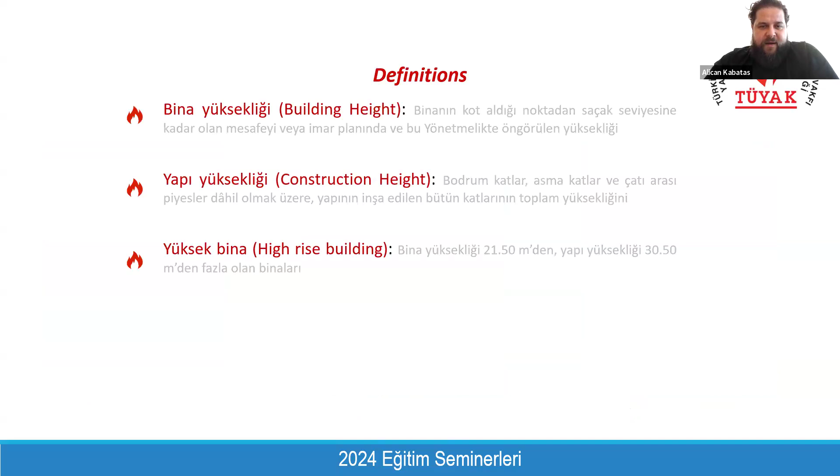We have three main codes and standards: Turkish Fire Code, NFPA 101, and NFPA 5000 that we follow during the architectural design. We had the definitions: building height, construction height, and high-rise building. Building height is measured from the ground level to the roof, and the construction height includes basement floors into the measurement. I would like to just summarize to remember what we are looking for during architectural design of the buildings.

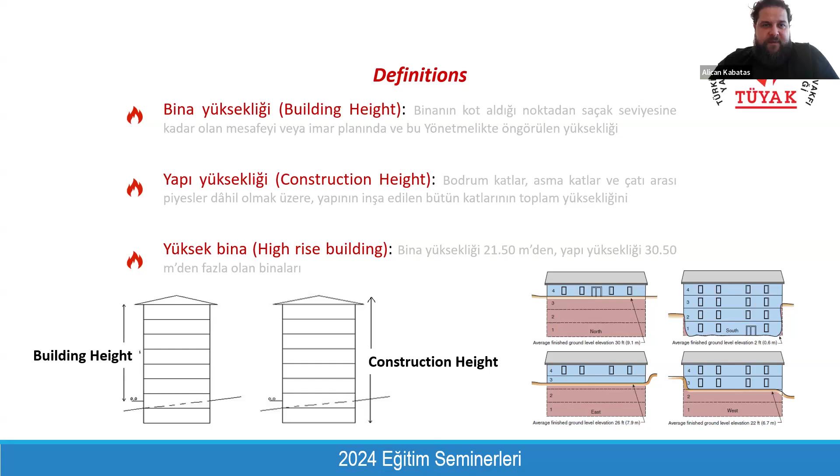I will not focus on these issues. This is a sketch of the measurement of the building height.

When the building is high-rise, as per Turkish Fire Code, high-rise building means your building height is exceeding 21.5 meters, or the construction height is exceeding 30.5 meters.

When the building is becoming a high-rise building, the automatic sprinkler system, landing valve system, and any other system that we will talk about become mandatory and should be provided within the building. And both the main technical rooms and the existence of this system within the floor, especially on the ceiling, will affect your architectural coordination and design.

It is better for architects to understand what we will have while we are designing the building. Otherwise, you will become aware only when the MEP designer submits their drawings, but it will be too late to coordinate them. It will cause you a problem to find a place to locate these additional systems.

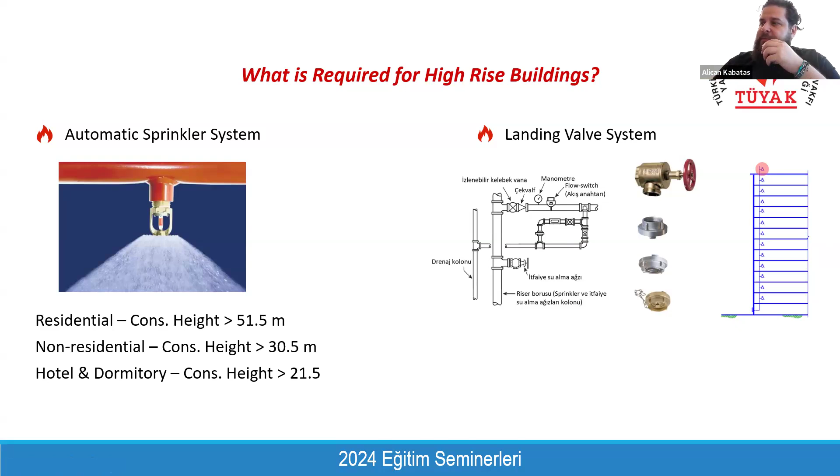And we have the landing valve system for high-rise buildings. It is located within the staircase. It means while you are designing the staircase, you should find a place to locate the landing valves. Otherwise, it will cause you a problem during the coordination of the systems.

And also for the high-rise building, we have a requirement for a pressurization system. If the construction height exceeds... or the height of the stairwell from the lower level to the ceiling of the stairwell exceeds 30.5 meters, or the stair serving more than 4 basement floors, should have a pressurization system.

Likewise, if you have a fire service access elevator, meaning the construction height exceeds 51.5 meters, this fire service access elevator well should also be pressurized. We will talk about the effects and consequences of having a pressurization system. We need to find a place to locate the fans, and also a place to locate the shafts, which should be neighboring the stairwell and the elevator well.

Also, we will have some corridor exhaust systems for high-rise buildings with construction height of more than 51.5 meters, and for hotels and dormitories regardless of construction or building height. If the corridor length exceeds 45 meters, either you need to divide the corridors into parts not more than 45 meters, or you should provide a corridor smoke exhaust system.

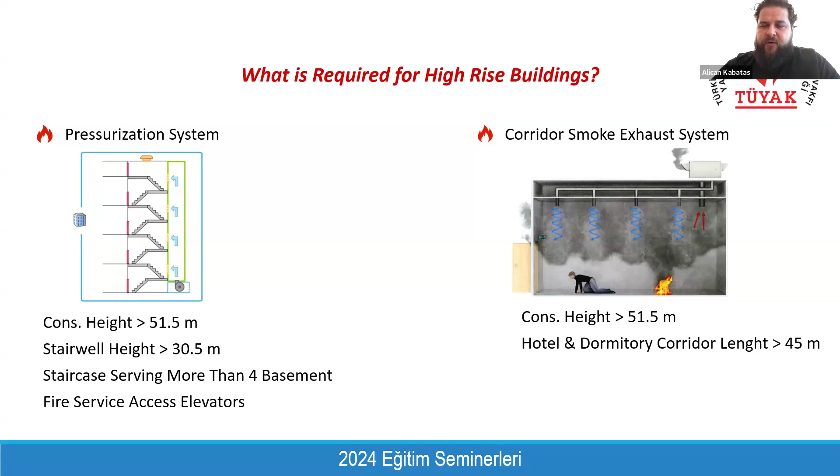When you have a corridor smoke exhaust system, you need to provide additional shafts for the mechanical designer, and it will affect the core design of your building. That's why this is also important.

In Turkey, while you are designing your building, the facade design is also very related to fire and life safety. The main thing is the material selection during facade design, which we already talked about in the architectural design lesson. Today we will see the details of the facade.

As per Turkish fire codes, you either have 1 meter by 1 meter of parapet having a 2-hour fire rating between the floors, or you need to provide a closely located sprinkler facade protection to prevent fire coming out from the window and reaching the upper levels. That is the main purpose.

And that's why if you don't want to have facade protection very closely located, 1.5 meters from the facade, with spacing between sprinklers not exceeding 2 meters, you need to design your facade to have a solid 1 meter height parapet.

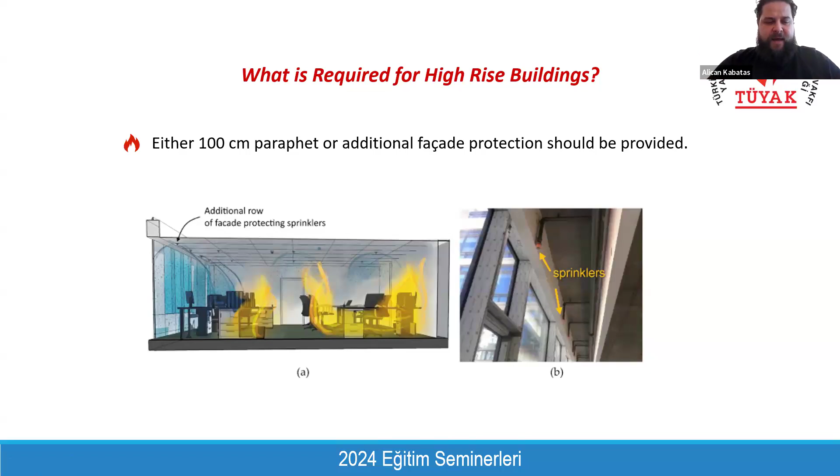And as you can remember, we have some common path of travel and travel distance limitations. These limitations change with the existence of an automatic fire suppression system, a sprinkler system. That's why even if the sprinkler system is not mandatory within your building, architects can prefer to have a sprinkler system to use smoother common path of travel and travel distance limitations.

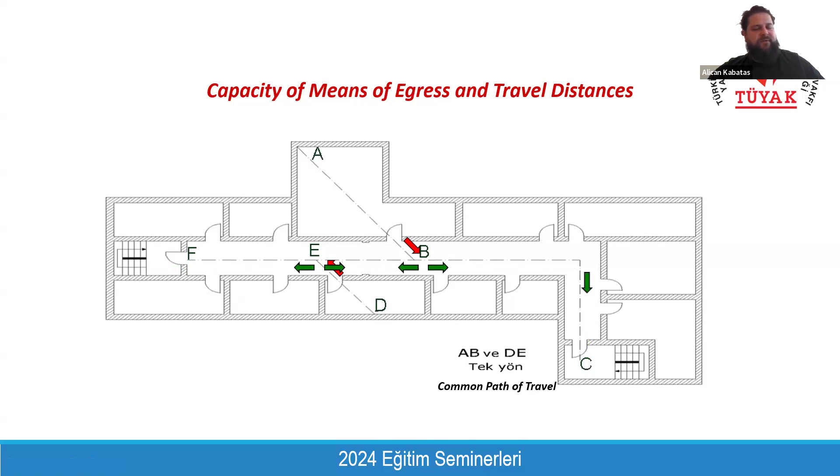It is up to the architect's decision. As architects, you will define the provision of the sprinkler system according to the travel distance measurements of your building.

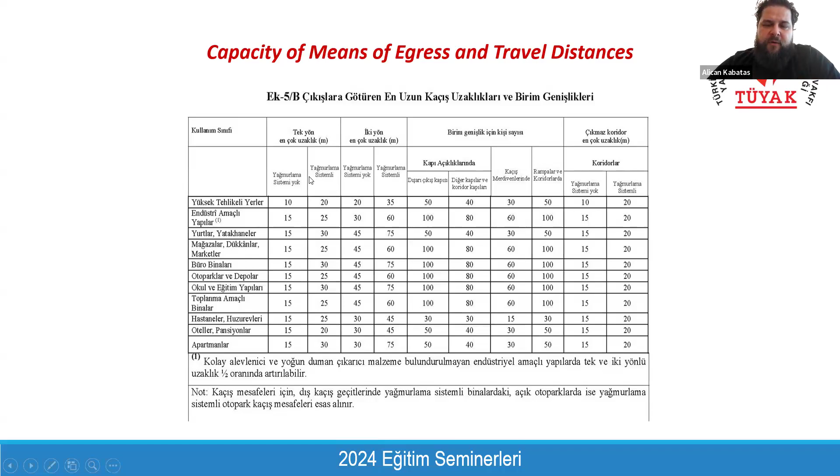As you can see, if you have a sprinkler system, the limitations become more smooth and flexible, and it changes your design constraints. Even if you don't need a sprinkler system per Turkish Fire Code, depending on your design requirements and the architectural design of your building, you can still choose to ask the mechanical designer to provide a sprinkler system.

I'm passing these ones. Sorry. And...

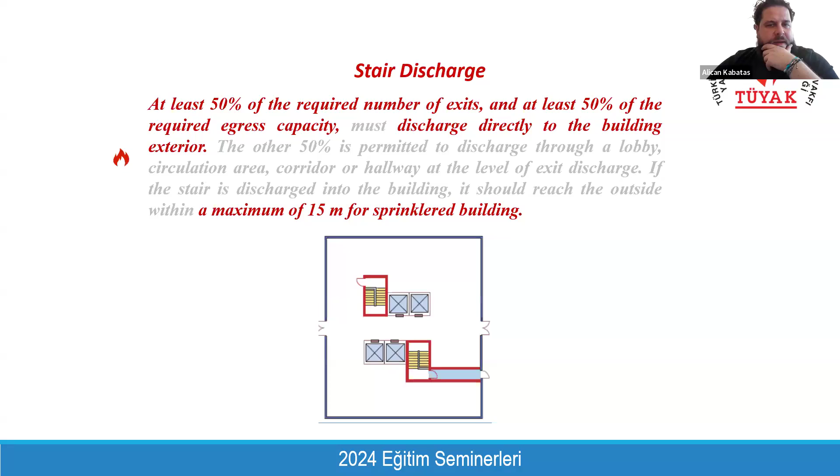While designing your building, if you have a sprinkler system within it, the heart of the sprinkler system is the fire pump room. Without a fire pump room, the system won't work.

That's why we need to locate these fire pump rooms in places that are accessible in case of fire or any other emergency. That's why we try to provide direct access from staircases, and you need about 150 to 300 cubic meters of water tanks to feed the system.

It changes from 60-minute to 90-minute capacity according to the occupancy classification of the building design. But you will have water tanks, and they will be quite huge within your building.

Since statically solving these heavy equipment loads is very challenging, designers always prefer to locate them on the lowest basement floor, so that all the load is supported directly by the ground, and you don't need to find a challenging solution from the statics point of view.

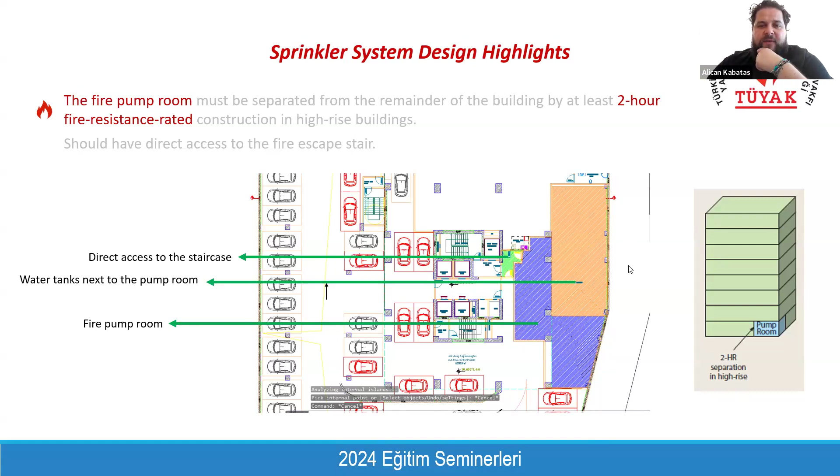That's why even if the whole level is affected by smoke and heat in case of fire, you should have easy and safe access to the fire pump room. Direct access to the staircase is very important and required by international codes and standards. As architects, when designing the building, you need to find the proper location for the fire pump room.

And the sprinkler design has some pressure limitations as well. We have minimum pressure requirements at the top level, and maximum pressure limitations at the bottom floor. That's why every sprinkler system is vertically zoned, each zone not exceeding 45 meters.

For every 45-meter vertical part of your building, there will be a separate vertical pressure sprinkler zone. Up to 3 zones, meaning up to 135 meters, you can solve the sprinkler design from the main fire pump located on the basement level.

But if your building height exceeds 135 meters, then you need to provide an intermediate level fire pump room to feed the upper floors, and it will cause a challenge for your architectural design.

You need to find a place at this higher level to locate the fire pumps and also water tanks.

But these water tank capacities are relatively small compared to the main water tanks—only 50 cubic meters. That's why they won't cause a lot of problems regarding static design.

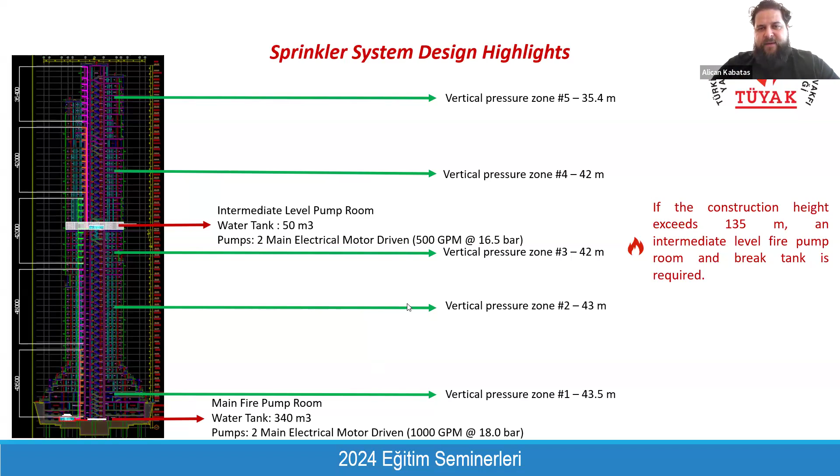It is located around 130 meters. When you look at the building, you can understand where the intermediate level technical room is—it's easy to see from outside the building. As architects, you need to know that you will have this kind of technical room if you are designing a very high-rise building.

Sprinkler system design also requires some design points that cross with the architectural design. For example, sprinkler risers, landing valves, and control valve sets. In every floor we have a valve and other equipment, and by passing through this equipment, our water reaches the floor and protects the whole floor.

But this equipment, and also the landing valve, should be located within the fire escape stair. The main reason is that the fire escape stair is considered a safe place, and in case of any fire, you can reach the fire escape stair without risk. That's why all fire safety related equipment is required to be located within the stair landing.

Also, when the fire brigade comes into the building, they will use these landing valves to take water and fight the fire. In order to prepare safely, they prepare themselves within the landing of the stair, where the landing valve is found, so they prepare their hoses and attach them to the landing valve before going into the floor to fight the fire.

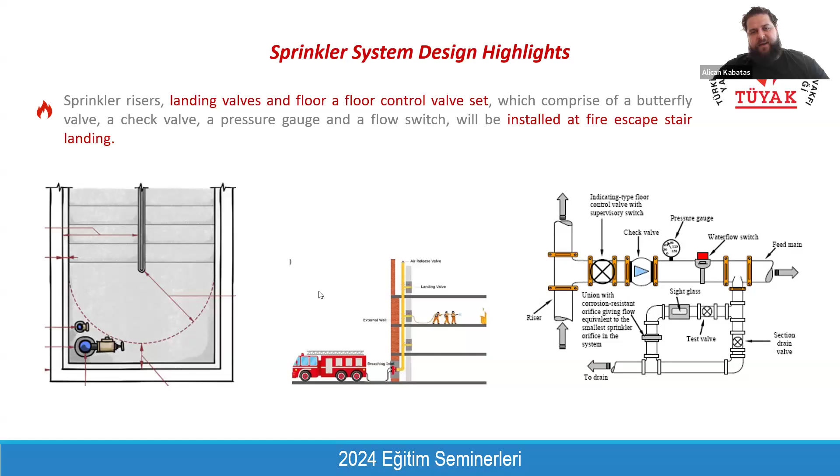Also, if your building has a fire service access elevator, we recommend providing the riser and landing valve in the stair neighboring the service access elevator. As you may remember from previous lessons, the fire brigade comes up to one floor below the fire incident, prepares there, uses the landing valve, and then goes into the incident floor. That's why it's very important that they have a landing valve within the stair.

Why do we locate the landing valve within the stair instead of the fire protection lobby? Because there can be a water leakage from these landing valves, and if water leaks within the lobby, it can reach the elevator well and cause the elevator to fail.

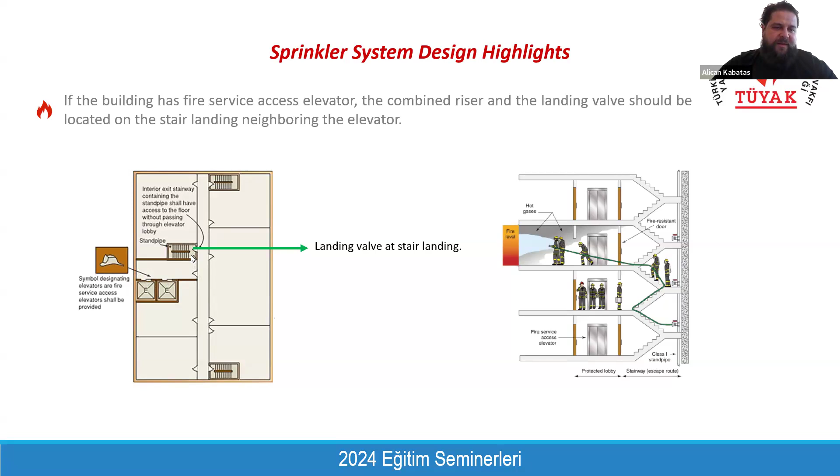That's why, instead of placing these landing valves into the fire protection lobby, we prefer to place them within the fire escape stair. So in case of any leakage, the water will not come into the lobby; instead, it goes down the stairwell.

Also, while checking the sprinkler design, it is very popular nowadays to use baffle ceilings or open grid ceilings, but nobody knows their effect on the sprinkler system. When these laminated baffle or grid ceilings are designed architecturally, the architect doesn't want to see any kind of installation beneath the ceiling.

But as per NFPA, if you don't want to locate sprinklers beneath these ceilings, there are some provisions: the opening rate of the ceiling should not be less than 70%, the spacing between the laminations should not be less than the depth of the lamination, and the h, the vertical distance between the sprinkler and the baffle ceiling, should not be less than 45 or 60 centimeters, so that you can omit the sprinkler beneath the ceiling.

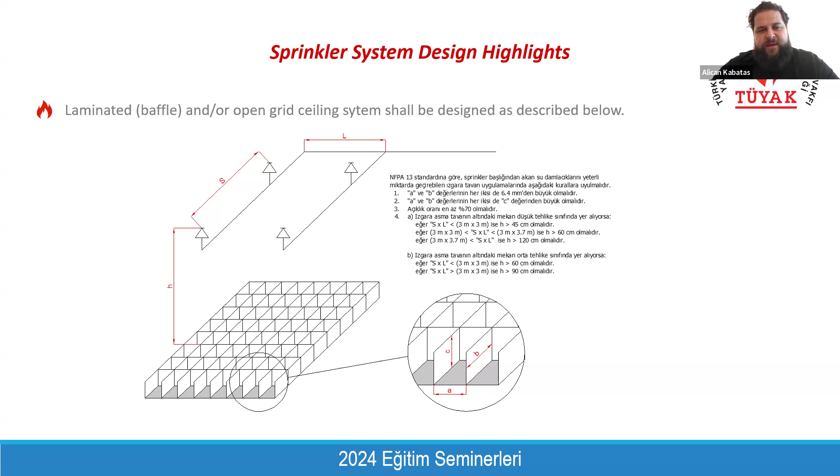If you are not aware of these rules, and you design your ceiling without fulfilling these requirements, at the end of the day the fire consultant of your project will require an additional level of sprinkler system beneath the ceiling, and it will change your design and the look of your ceiling. That's why it is also important.

And these are our sprinkler systems. The colors may not match your interior design, but we are not allowed to paint these sprinkler systems on site. This should be remembered during site checks by architects who work as a site consultant.

It should not be painted on the site. Instead, during the procurement phase, you can give the manufacturer the RAL code of your ceiling, and they can manufacture sprinkler heads with the same color as your ceiling. If you don't want to see these details, the deflector and the activation bulb, you can use recessed or concealed type sprinkler systems.

Concealed type sprinkler systems have some plates. These plates are also not allowed to be painted, but you can procure them with a RAL code matching your ceiling design.

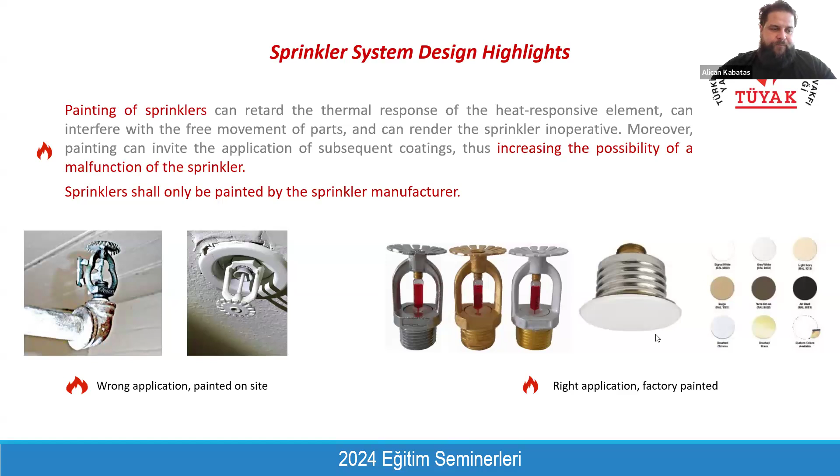But all of this coordination, the code selection, the color selection, and the procurement should be coordinated by the architect, and all required information, such as the color code of the ceiling and the preferred type of sprinkler heads, either semi-recessed or concealed, should be defined and determined by the architect. That's why you need to inform the mechanical designer accordingly.

As you know, we have fire hoses within the floors, and these hoses are not liked by architects. They don't want to see these fire hose cabinets, and they always require covering them with decorative floor finishings. We are allowed to cover these hoses, but we need to emphasize that there is a fire hose cabinet at the back of this wall covering.

As per NFPA, we have some pictograms and definitions for proper signage. We need to follow it and provide signage with the required dimensions and contrast colors, so that in case of fire, the occupants of the floor can understand where the fire extinguisher and fire hose cabinet are, so they can address the fire at the beginning and prevent it from developing.

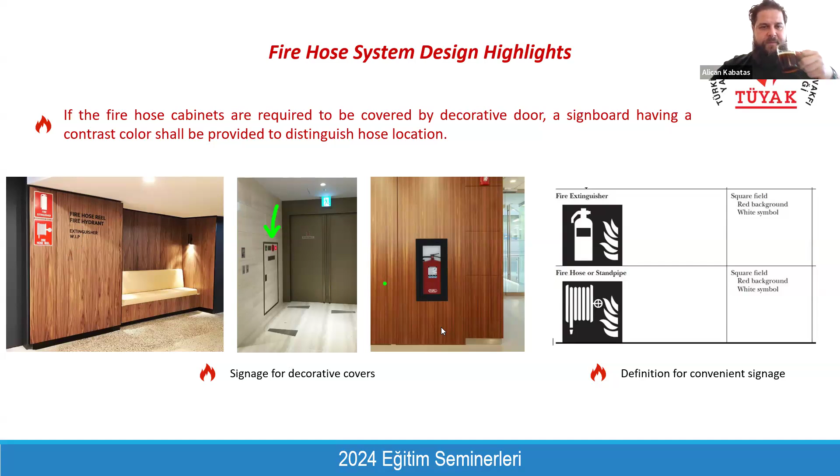These embedded flush type fire hose cabinets are not allowed to be located within a fire rated wall, because embedding this kind of material into the wall reduces its main thickness, and the thickness of the wall is what creates the fire rating. That's why if you would like to locate fire hose cabinets onto a fire rated wall using embedded or flush type cabinets, you need to design your wall construction accordingly.

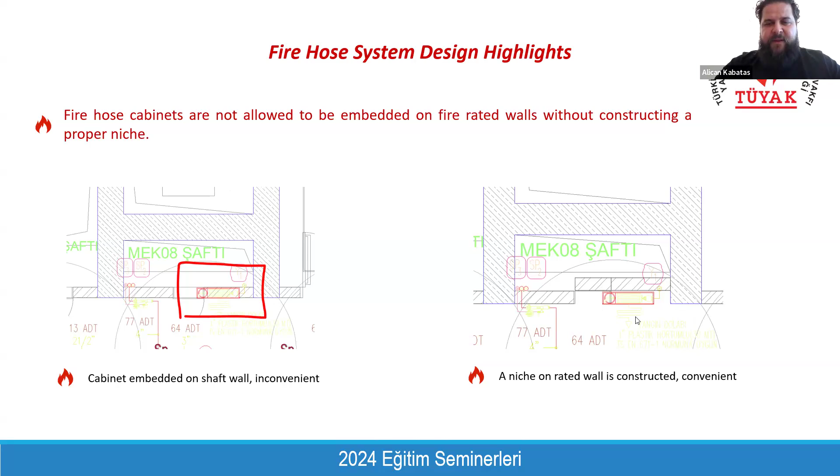You need to design your wall with a convenient niche on it. Owing to this niche, without damaging the wall, you can locate your fire hose cabinet, and it can look like an embedded flush type cabinet from an architectural point of view.

For high-rise buildings, hotels, and dormitories, we will have a corridor smoke exhaust system design. This system should have a smoke shaft, and in order to achieve smoke extraction, we also need a fresh air shaft. We need to provide fresh air, and then extract it from the floor, meaning we will have at least two additional shafts.

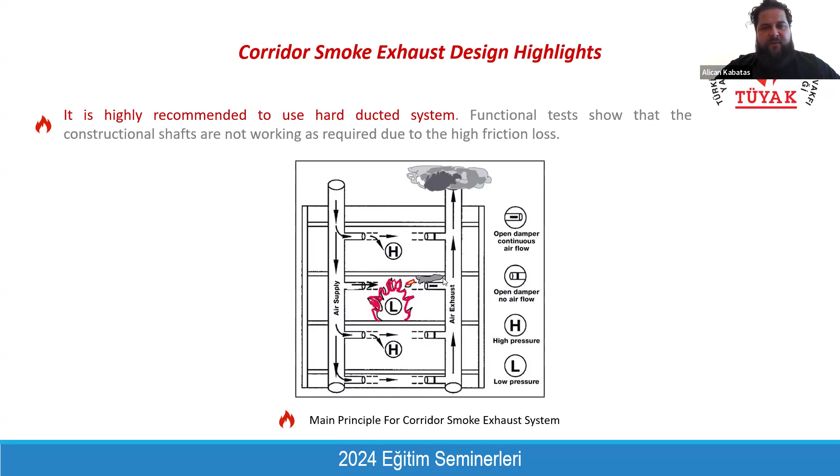The dimensions of these vertical shafts depend on the capacities of the smoke extraction system, and their locations are really important. The locations are generally determined by architects. Even if the mechanical designer insists on certain locations, if it's not accepted by the architectural team, it will not be applied on site. That's why, as architects, you are responsible for finding a proper location for the shafts.

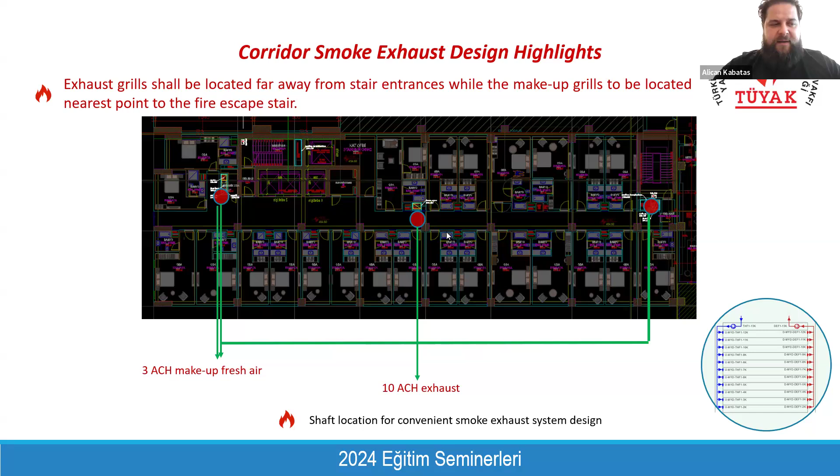The exhaust shaft is determined to be as far as possible from the stair entrances. The makeup, or fresh air, shafts are located nearest to the staircase, so that when you provide fresh air next to the fire escape stair and extract smoke from the farther location, you move the smoke from the entrance of the fire escape stair to the center of the corridor, keeping the entrances of the fire escape stair smoke free. This is the main design principle architects should know.

Also, if you have a pressurization system, it prevents smoke from entering the fire escape stair by giving fresh air into the stairwells. That's why the location of the pressurization fan is very important.

You either need to locate it at the top of the stairwell, meaning outside of the building, or you can locate the fans within the building. But when you locate the fans within the building, the room where the fans are located will be considered part of the fire escape stair, meaning it should be 2 hour fire rated and separated from other areas.

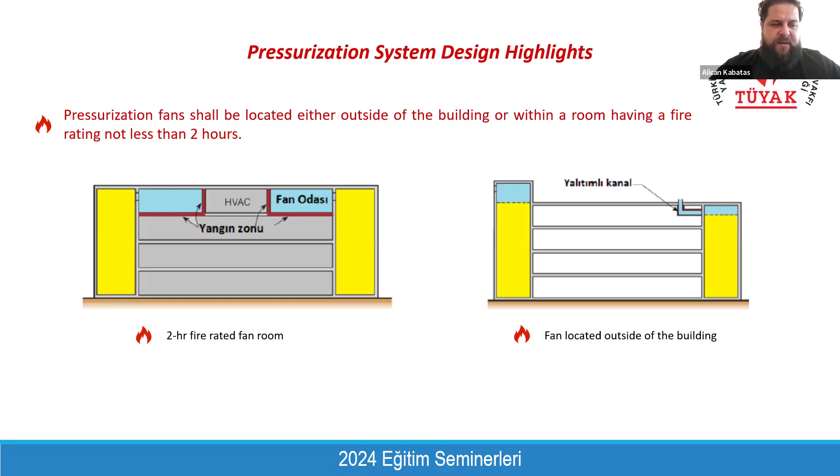If the fan is located outside of the building, you need a duct between the fan and the stairwell. This duct should be 2 hour fire rated and insulated, so that the shaft can be considered extended up to the pressurization fan, and it will be safe in case of fire. Our main purpose is to keep the integrity of the fire compartmentation of the fire escape stair, ensuring that its fire zoning will not be interrupted by any other equipment or occupancy within the building.

If the stairwell height exceeds 25 meters, we are not allowed to use single injection, meaning giving air from the top of the stairwell. Then we will need a pressurization shaft for multi-injection.

It is achieving a good pressure equivalence within the stairwell. Otherwise, if you just give air from the top, the higher floors will have relatively high pressures while the lower floors will have less pressure, causing a stack effect, and smoke can interfere and go through the stairwell, causing a life safety problem. That's why if the stairwell height exceeds 51.5 meters...

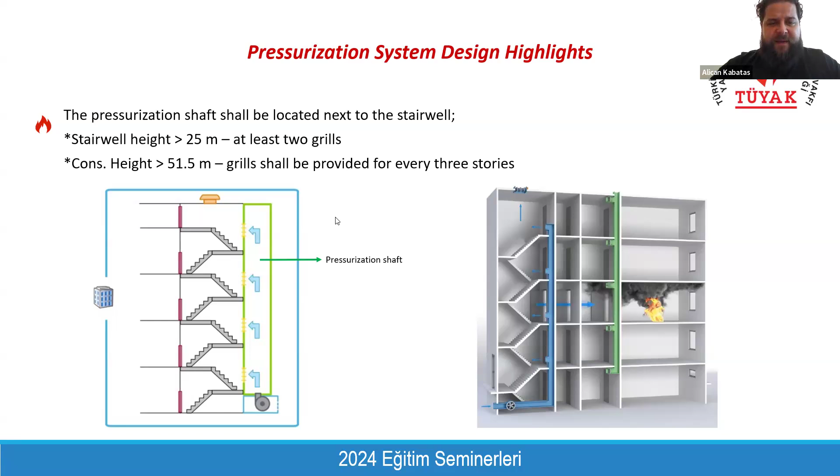we need to have a pressurization shaft, and this shaft should neighbor the fire escape stair, because the pressurization shaft is a part of the fire escape stair. It should be considered as an extension of it, so it should be just next to the fire escape stair, and the wall between the fire stair and the pressurization shaft should not be required to have fire rating.

But all of the other three walls should be fire rated. That's why if you are designing a high-rise building that needs a pressurization shaft, it should be designed at the beginning of the project. Otherwise, finding a place for that 1 square meter shaft will be a huge problem during your core design. You need to take space from other shafts or technical rooms, or enlarge the core,

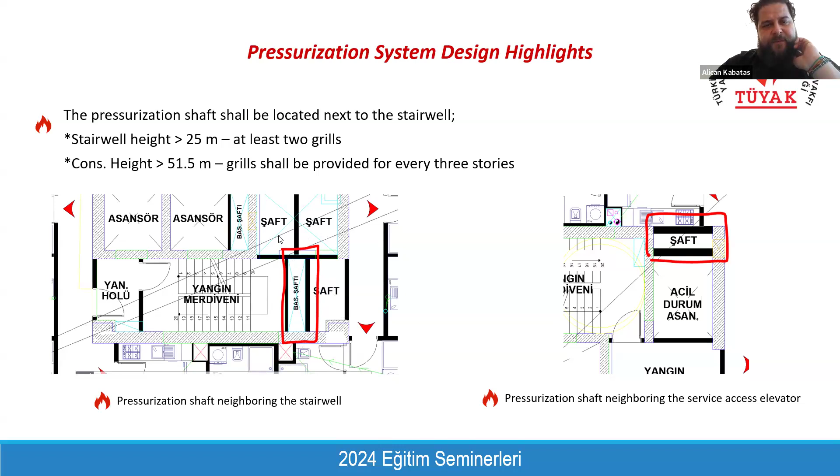which will not make the investor happy. Also, as I stated, the required area for the pressurization shaft is about 1 to 1.1 square meters. The aspect ratio is also important - the ratio between the length and width of the stair shaft. It should not exceed 1/4, because otherwise, even if you provide 1 square meter, the shaft will not work as required. It will cause a lot of pressure drop and the system won't work.

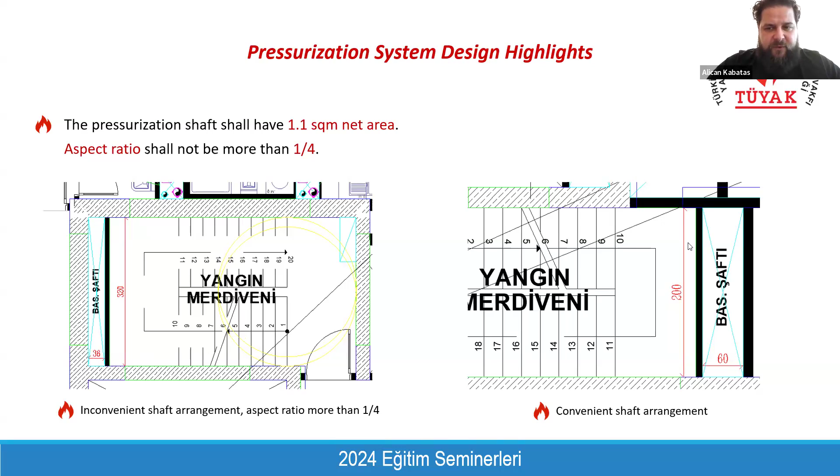That's why while designing a shaft, it should not be very narrow, and it should not be very wide. The aspect ratio should be kept between 1/3 and 1/4 so that it can work as required.

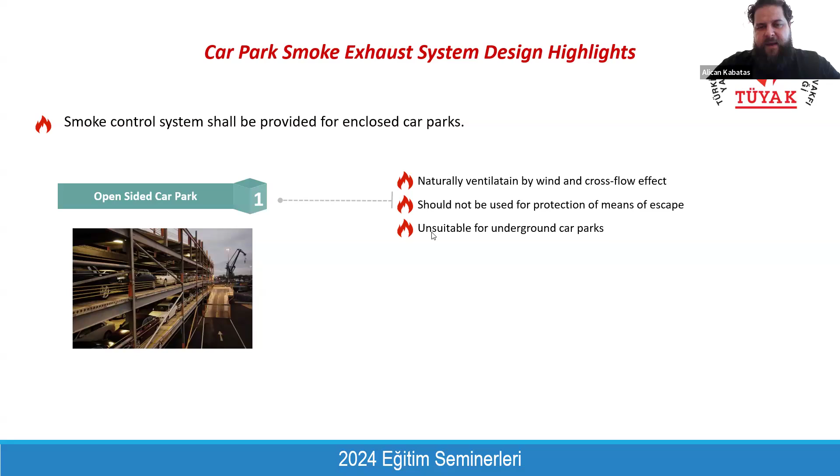What is an open car park? It is naturally ventilated, that's why smoke extraction system is not required. But in order to classify a car park as open, at least 5% of the floor area should be provided as openings on the facades - not less than 5% of the largest floor area - and at least half of them should be located face to face so that we have natural ventilation on the floors.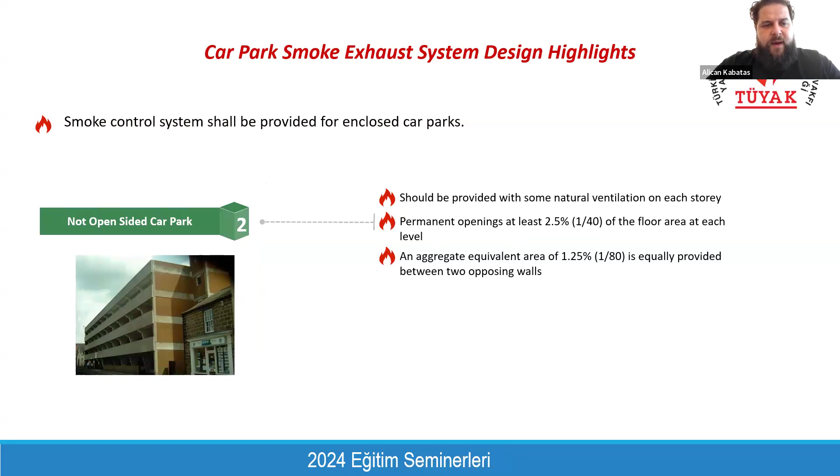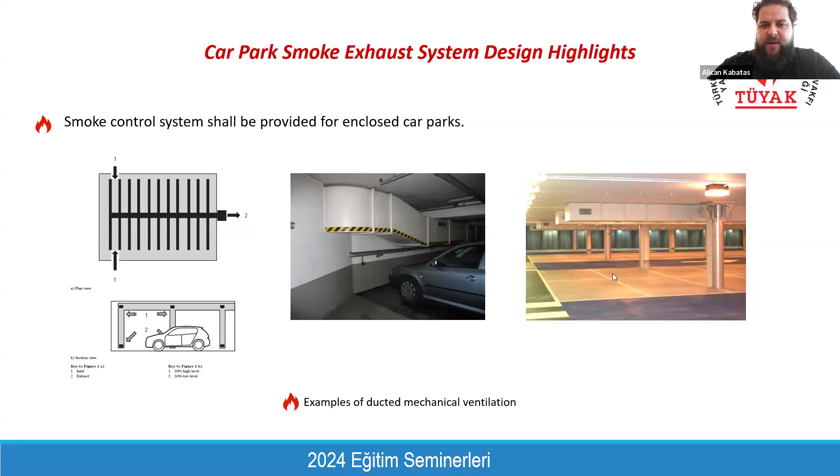And for the enclosed car park, as we stated, we have to provide a smoke extraction system. There are different types of smoke extraction systems - ducted types, and jet fan systems. The ducted type of smoke extraction system takes a lot of space from the floor height, and as you know, due to investment issues, the height of car park levels is tried to be kept at a minimum. That's why nowadays you don't see a lot of these ducted systems.

Instead, they are using jet fan systems. Jet fan systems are standalone fans, and they do not cause a loss of floor height. That's why they are preferred, and you can ask the mechanical designer to take the floor height limitations into account and provide a jet fan system.

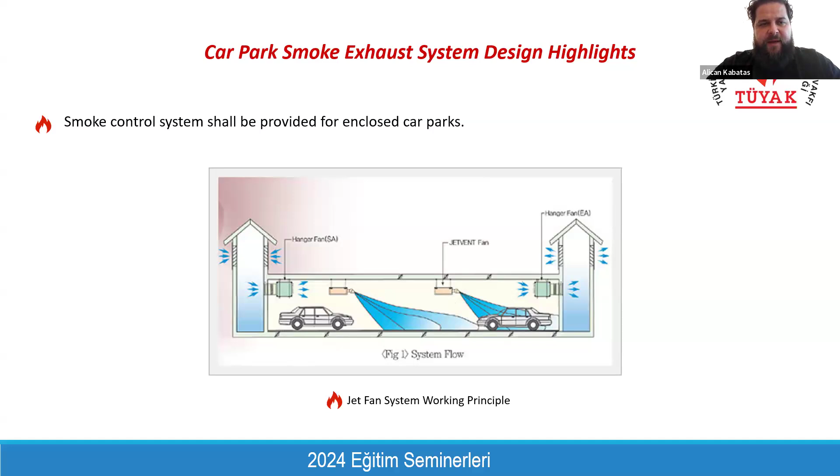But what is the negative side of the jet fan system? It requires exhaust shafts and makeup air, fresh air inlets. That's why you need to discuss with the jet fan designer to understand how many shafts are required, and these shafts should be located so that we can route the smoke from the makeup point to the exhaust point without having a bypass.

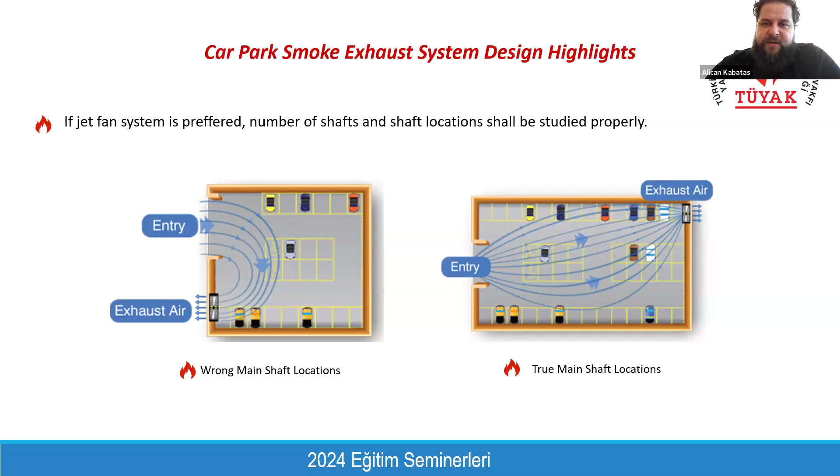If you locate these shafts just next to each other, instead of extracting smoke from that part of the car park level, you just bypass the fresh air and the system won't work. That's why the shaft locations and number of shafts should be coordinated with the jet fan designer, and this coordination is also done by the architectural team.

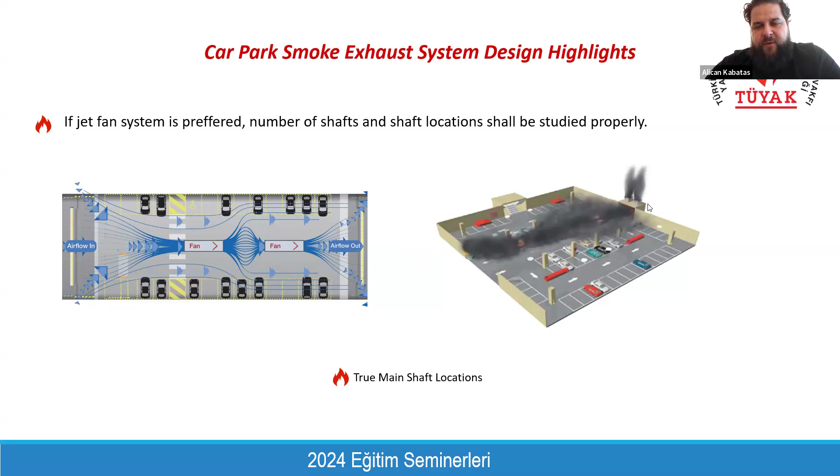As you can see, this is the proper shaft location. The fresh air comes from this side, and jet fans take the smoke and put it on the other side, and through this extraction shaft, it is exhausted.